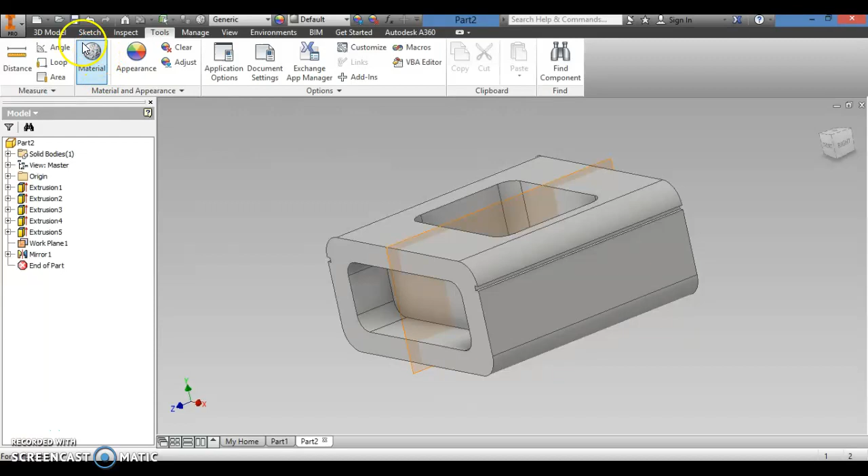Now that you completed that portion of the passenger section, before we move forward, we are going to change the material for this one. Under your Tools tab, go to Material.

This is a wood material, it looks close to birch, so we're just going to hit Add to Document. Close it out, and it changes the material of the entire object.

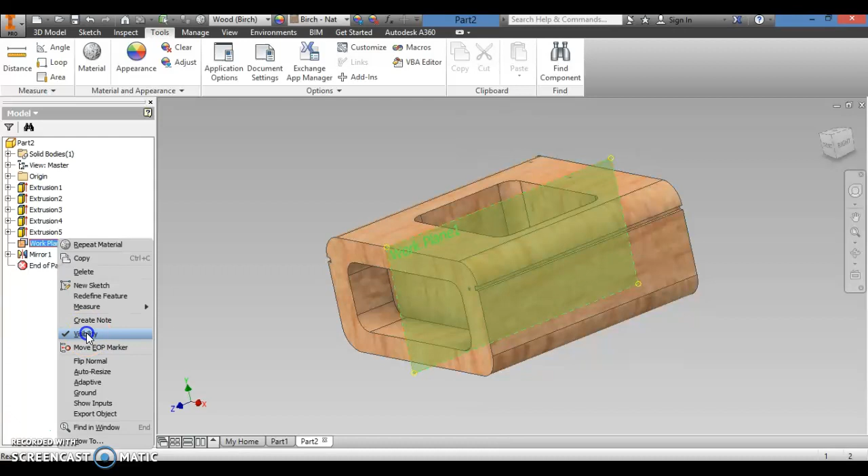The next thing you need to do, if you still have it on there, turn the visibility off for the work plane so it doesn't show up. The next thing we are going to create is the T9 portion that is on the car.

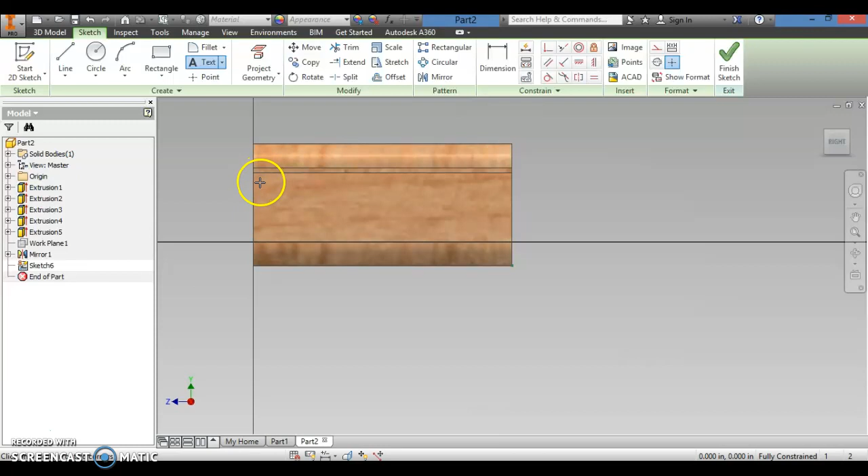We're going to start a sketch on this side, and then use the text tool. I'm actually going to make two text objects, one for the T, one for the 9, because they are different sizes. I'll make the T first, clicking T.

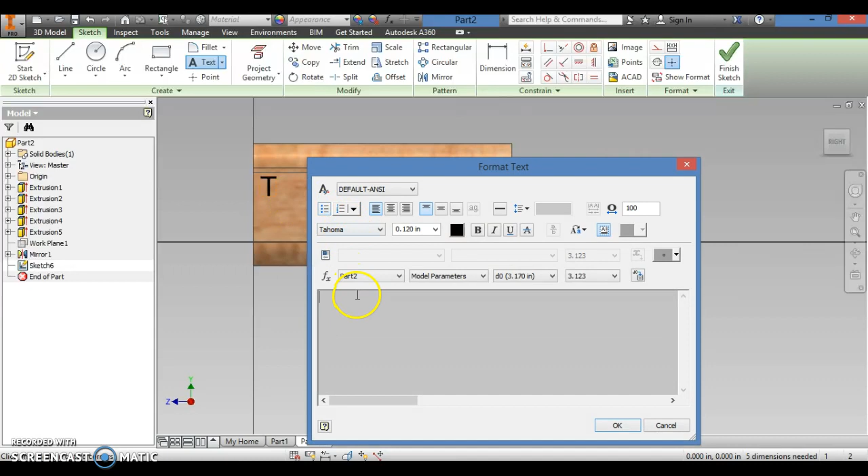0.25 is around about a pretty decent size. Then I'm going to make the 9, and we'll see how that one looks small. That's actually pretty close to the size I would want it to be.

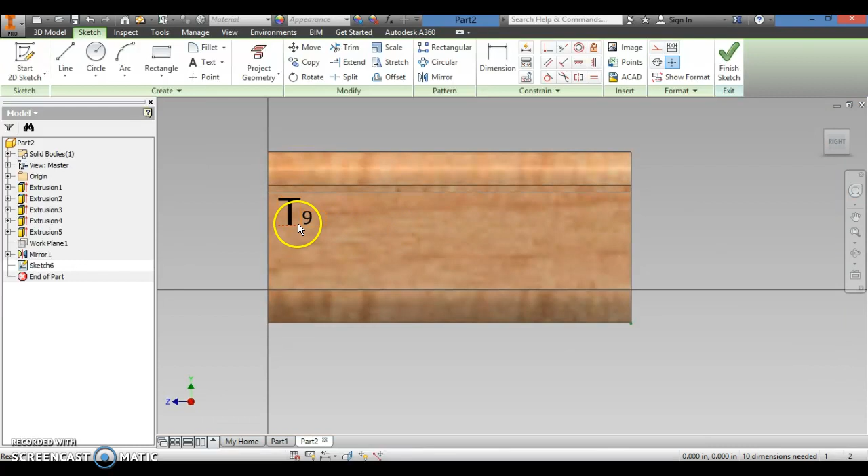I'm going to zoom in a little bit so I can move this over here next to it, click and drag, so you have something that looks just like this, the T9 for the one portion.

Once you have that done, go ahead and finish the sketch, and then we are going to use the Emboss Tool. The Emboss Tool is going to let us extrude these letters and the numbers.

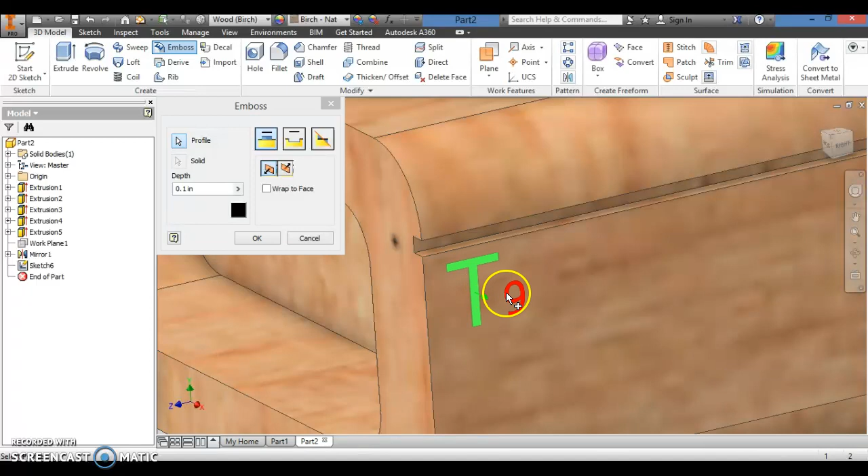I'm going to zoom in and make sure I actually click on the T and the 9, and change the depth to 0.2. Hit OK, and it will extrude those.

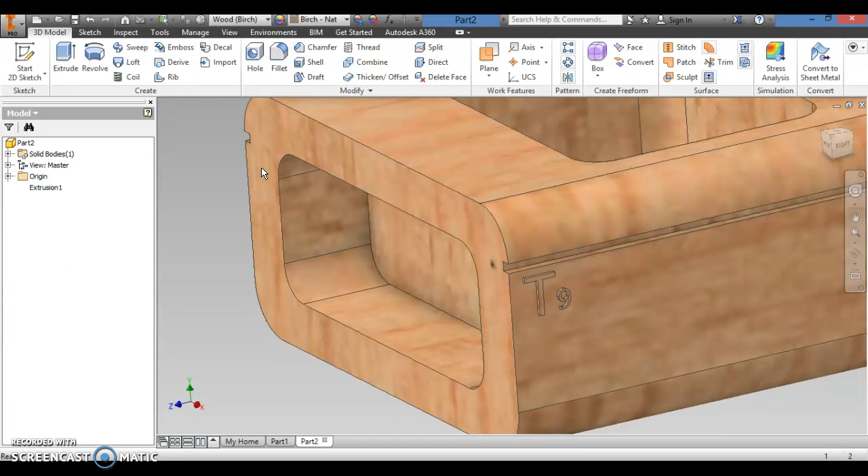That's a little bit further than I wanted to extrude it, so let's set it to 0.02 and hit OK. That's a little bit better, I like it only sticking out slightly.

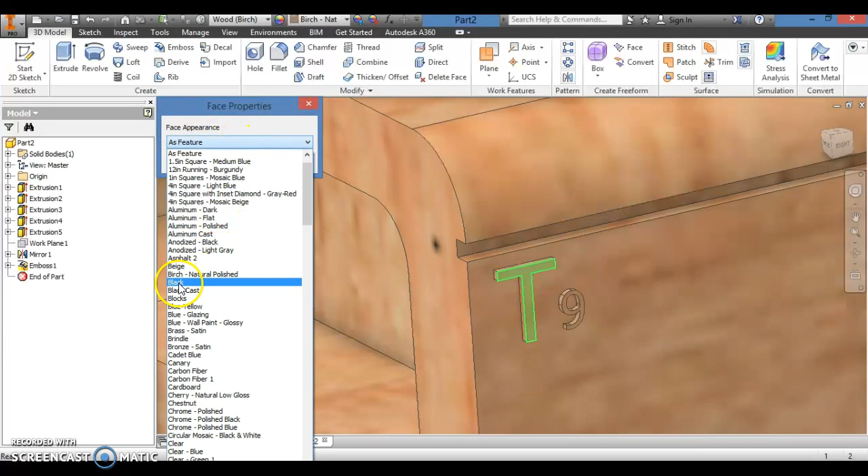Next we'll change the face color of the number and the letter so that it matches. I believe it's set to black. You can right click on it, go to the Properties tab, change the face appearance to black, and hit OK.

We can do the same thing with this one: right click on it, go to Properties, and set it to black.

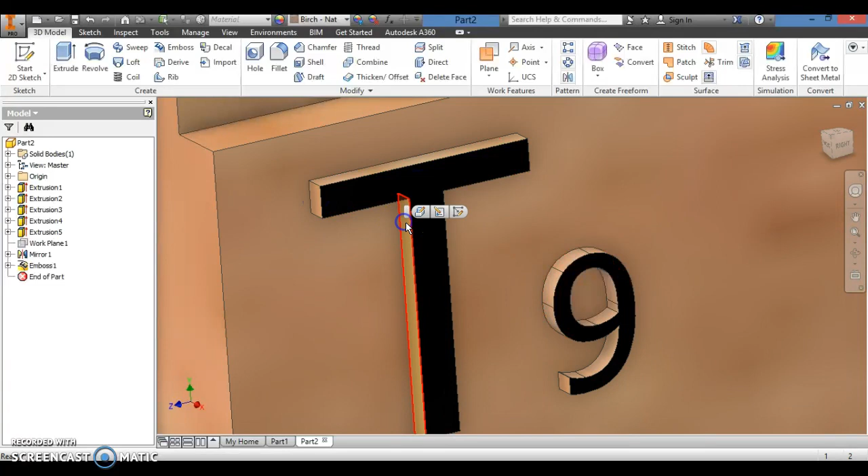Now you could just do the face, or you could do the entire sides as well if you want to, it'd probably look a little nicer. You could do that by clicking on the side you want, and again changing the color like this, setting it to black, then hit OK.

You don't have to do that. Once you have it at this point, it should be okay, it should look like this.

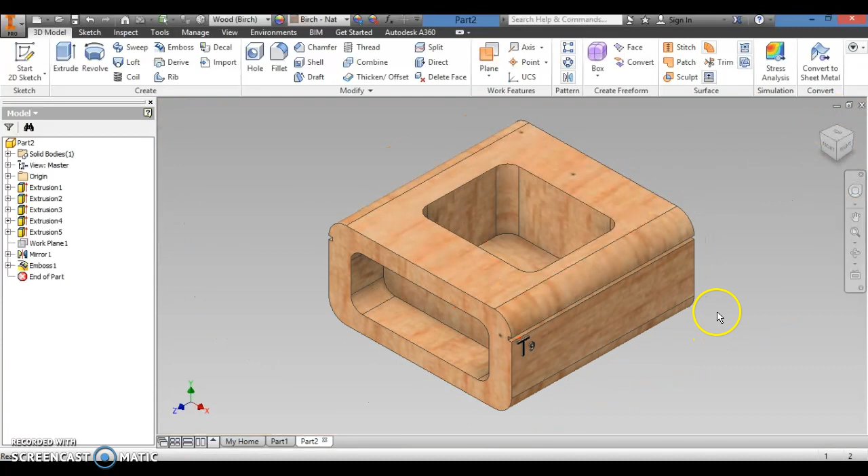If you want to mirror this to the other side, you could use the mirror feature and choose the T and the 9, choose the plane, click over here, and hit OK. So I have that mirrored onto the other side, but it's backwards.

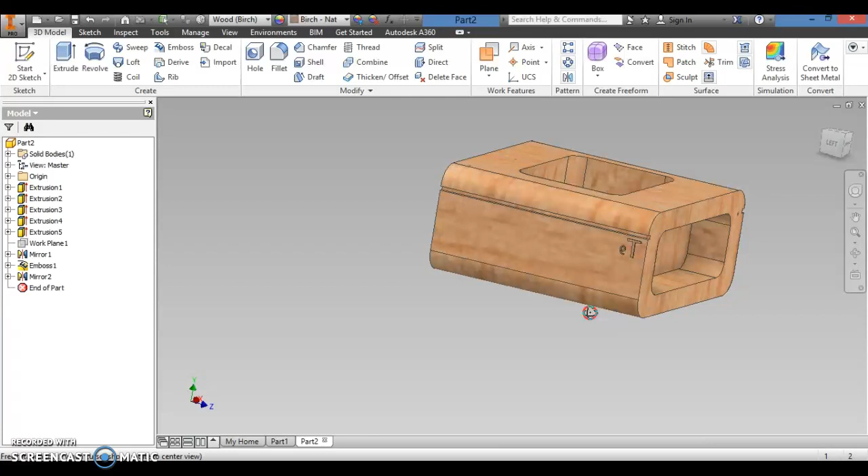If you do it that way, you'll get a backwards letter. If not, just make the T and the 9 on the other side the same way. Once you're done with that, update your save, and you should have your passenger section complete.